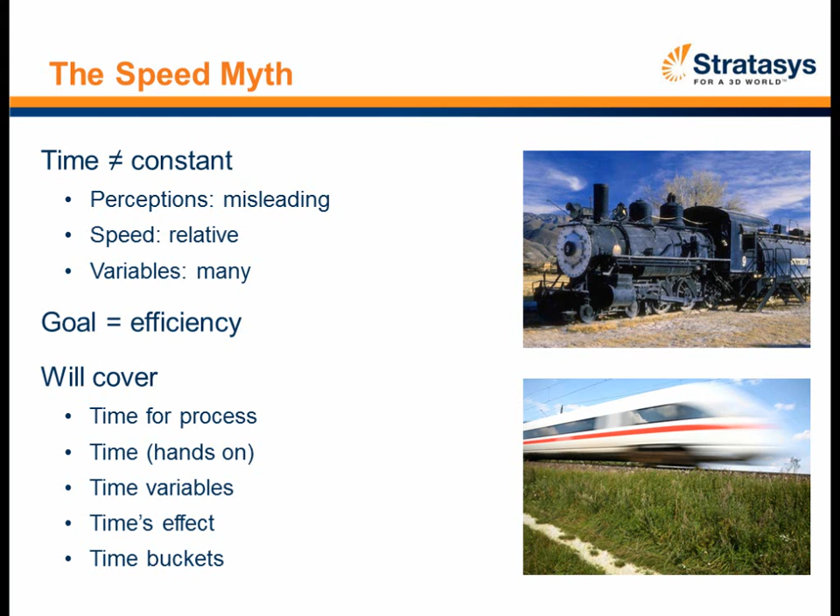And to start off with time for the process, the fable of the tortoise and hare popped to my mind immediately as I started putting this webinar together. Of course, we all know this fable. The tortoise plods along, heads straight for the finish line, wins the race because the hare darts along in one leg, stops and dawdles around and just kills time, then races again, and then stops and dawdles around a little bit, and then races again, but doesn't cross the finish line first.

In 3D printing, those legs of the race that the hare's creating, the start and stops, are actually part of the total process. It's not just build time. What you need to evaluate is more than build time. You've got to evaluate the total process time for what I've indicated here is file, which is file preparation, prep, which is machine preparation, the build time, which is important, but it's just one element, waiting time, that's after the machine finishes, but before you get to the final process, which is post-processing. You've got to evaluate each one of those 5.

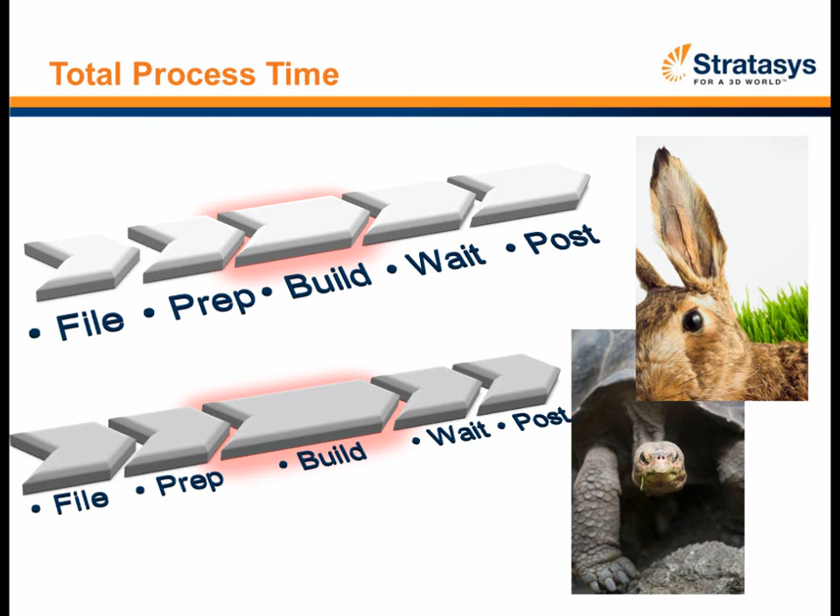Now, I'll give you some information on each of those 5 steps, information that will allow you to ask intelligent questions and to dig in to what will affect your total throughput and your delivery time for your prototype parts and additively manufactured parts. First step, and again, this isn't specific to any one technology, and these are just some of the highlights. I can't get into all the details because the technologies are so different and have so many different variables and factors. But overall, these will be true of most systems.

Right up front, you've got the time to prep your file. This is once you've received the STL file, how much time goes into processing it to make it buildable. And that'll include orienting the part. That'll include the time to add support structures to the part, the time to slice the part, and the time to apply the build parameters, which may be default build parameters, which is a simple one-click operation for some systems, or you may actually be using some custom parameters, which may take more time.

So it's important to investigate each one of these aspects in file preparation to come up with your total tally for your parts on how long they'll take. And one thing I don't have listed here is there may be the need to do some file repair. STL files are notorious for having small gaps and overlaps and inverted normals that make them unbuildable files. Well, some technologies are more sensitive to small deviations and errors than others.

So you may even find in file prep that one system you need to do STL repair, another system you don't. The STL repair may require a third-party program, an additional step, which all adds time.

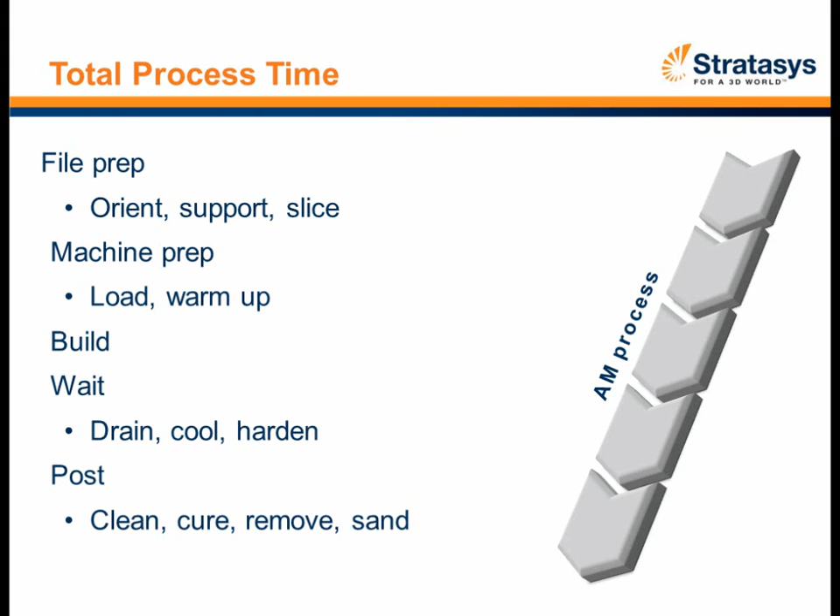You remove the material, and then you also remove support structures. And then finally get to the point of sanding the part and finishing and painting to your needs. It's important to understand all those steps and the time that will go into the process for your typical parts. Now, that's the total process and what goes into it.

Another aspect of time and speed of delivery is manual versus automated. Now, this is one that may or may not be important to each of you as individuals, but something to consider. I personally think that a 2-hour process that's entirely manual versus a 2-hour process that's entirely automated are two different things. I'd view the fully automated process as being more efficient in delivering the parts because we're looking at resource demands.

A friend of mine in the toy industry I spoke to several years ago actually gave up on using a technology that produced very nice parts for small figurines that they were doing. They loved the technology, loved everything about it, but they stopped using it because they could produce dozens in a couple of hours, but it would take them 2 or 3 days to get the manual labor, the man time, the resources, the human resources into the post-processing operation to even start touching the parts. So a couple of hour turnaround time turned into 2 or 3 days for them.

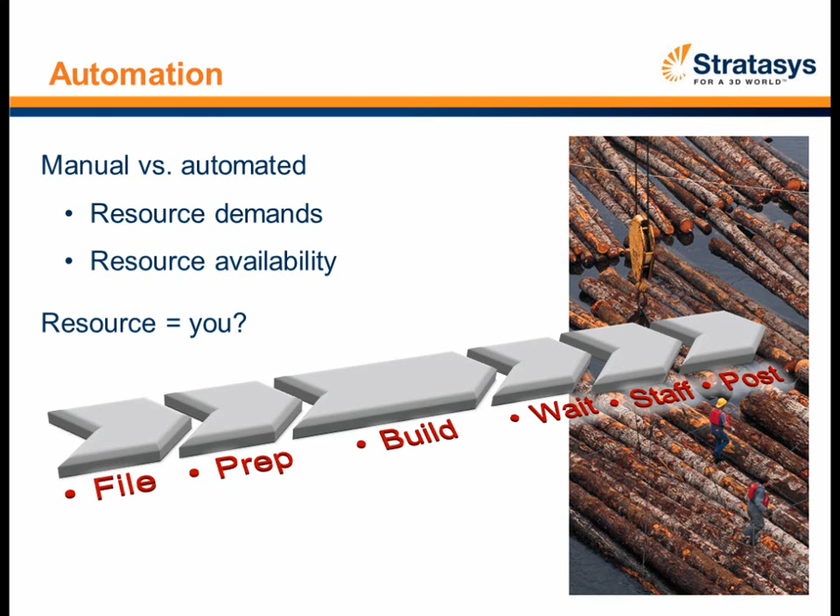Now I really think automation comes into big play because while you're busy doing a post-processing operation or manually doing something in the 3D printing operation, you're not doing the job that you're paid to do. So there's forest fires raging, there's projects to be tackled, tasks to be done, and your decision is, do I tackle those or do I go and do the manual operation?

The next area I want to talk about is build time, or actually the variables that go into defining the total build time. Build time is not a constant because it depends on the parts that you're building. We have 2 different modes of operation for building for most of the technology. You can have presets, which are default build styles. Simply select from a drop-down list and say apply style A, and that's how the part will be built. Or you can apply your own custom configurations, custom styles to get different qualities for your part.

Well, even with the presets, the fixed build styles, you'll find that there's a lot of variance in build time based on things as simple as orientation of the part, the volume of the part, the surface area, and the footprint. Matter of fact, if you took two identical parts in 3 of these 4 categories and left only the 4th category as a variable, you change that one up, you will have 2 different build times in most of the technologies. Now, let me explain these real quick.

Orientation is the orientation of the part. I think as many people recognize, the taller a part is in 3D printing, the longer its build is going to be. So orientation has a big effect on build time. The volume of the part, that's the total cubic inches of material that go into your part, may also have an effect on time for some technologies.

Surface area, now this is one that people really don't think about. There can be different build approaches or styles. The system may perform differently on external and internal skins than it does on all the area that fills in between. And usually what's being done is things are changed to improve surface finish or feature detail. Well, to change surface finish and feature detail often means that the process is slowed down. So if you have more surface area, more exposed area on the part, you might have a slower build time or a longer build time.

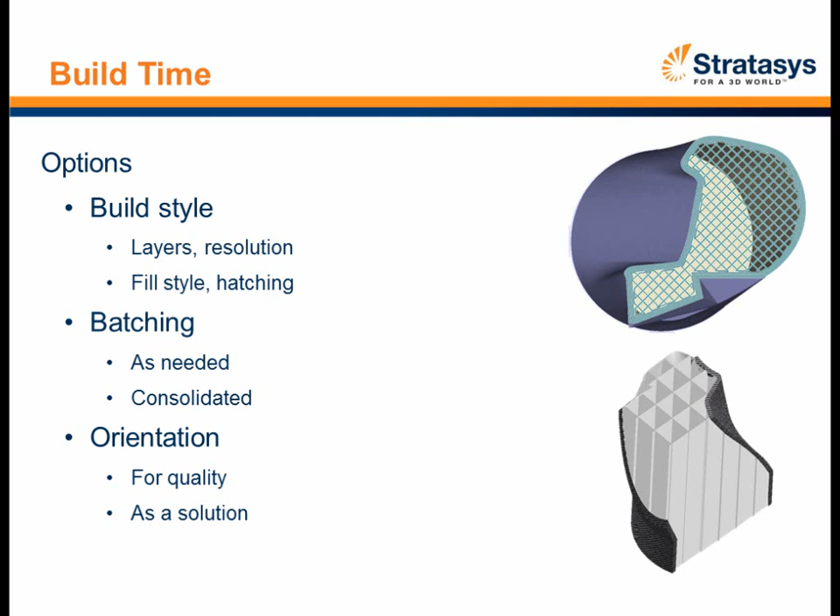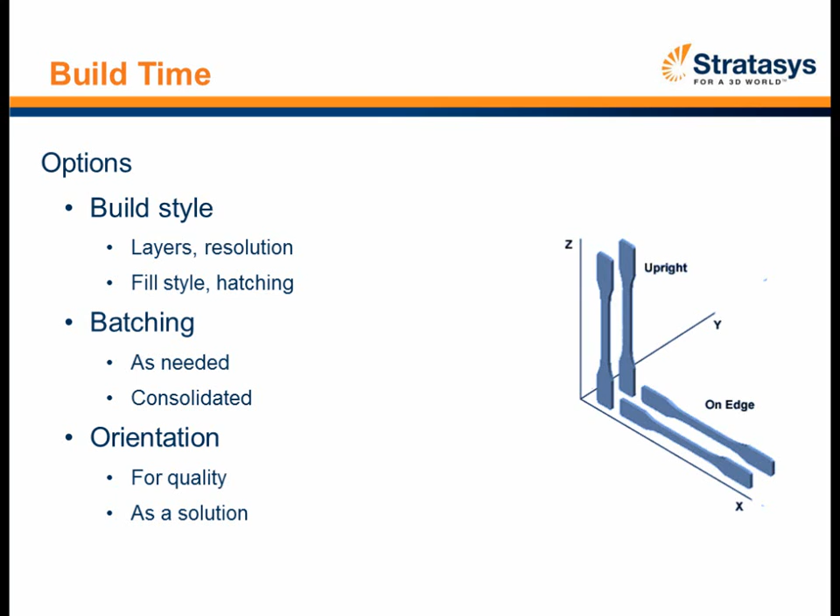So that's not all the variables in build time, but those are some of the things that you want to consider in your evaluation to discover what's truly the fastest. Now I'm going to move on to the fourth area, which is time's effect on time. And it's not a very good title for the slide. I know what I'm trying to say. It doesn't come across here, so let me explain.

Over time, some 3D printing technologies will get slower. So if you were to build Part A on day one and it takes 4 hours, a year from now, you may find that Part A builds in 5 hours, 6 hours, 7 hours, some additional time. And the possibility for it is twofold. One is if the system has an energy source converting the material into a solid form, and that energy source slowly degrades over time, well, it's going to take more time to process the part. Also investigate if there's any changes in the material's reaction to the processing.

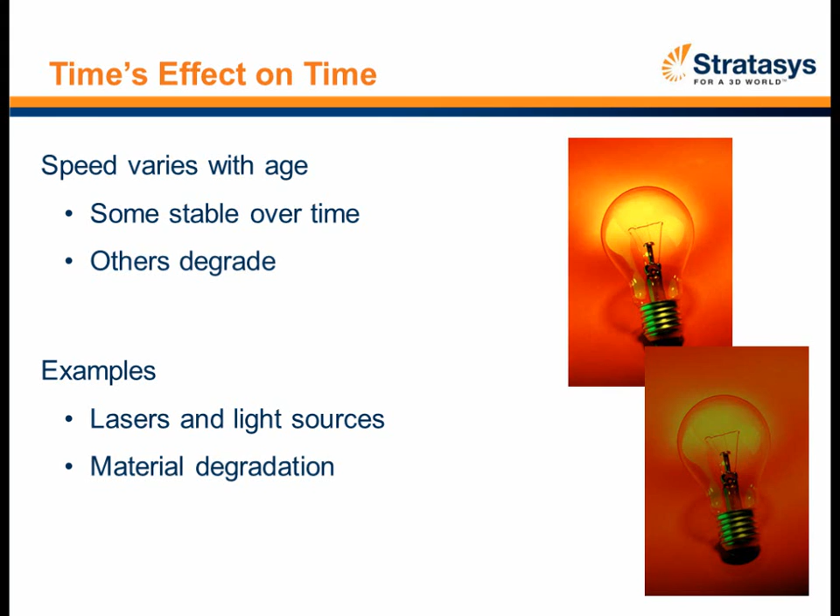If you have a technology where you replenish material after every build by adding fresh material to something that's already been in the machine, the older material, the material that's already been processed, may have gone through some changes that affect its ability to cure, to solidify, to be processed as quickly as when it was fresh. So that's something to consider when you're looking at total speed and delivery time of your prototypes when you're evaluating the technology.

Now I'm going to move on to the last of the 5 areas that I want to bring up with respect to the speed myth, and this is time buckets. Now this is fully in your control. This is about how you will operate your 3D printers in an everyday, normal fashion. Now, I'll admit, it's always comforting to know that your 3D printer could respond at a moment's notice to an emergency. So there's a design review meeting called, surprise, surprise, at 8 o'clock tomorrow morning, you need to rush out parts, or a big problem happens and you need to come out with a new redesign real quickly. Well, it's nice to know you can respond to that quickly.

But I find from day to day, and this is talking with lots of customers, lots of users of 3D printers, that we tend to fall into standard operating modes. I've already talked about parts individual or consolidated, and this is kind of back to that, but you'll fall into the operating mode of building parts as you need them or consolidating multiple parts in a build. And if it's the latter, then you'll probably find yourself working in time buckets. Mentally, your schedule will operate on maybe a 4-hour cycle or an 8-hour cycle or a 24-hour cycle.

And what I mean by that is you start to go into your days, your weeks, and your months with respect to your 3D printer, considering that you'll kick off a build at 8 in the morning and then one around noon if you have 4-hour cycles, then one around 4 o'clock. If you're an 8-hour cycle kind of company, it would be one at 8 and one at 4. And if you're 24 hours, it would be one at 8 in the morning and the next one at 8 in the morning.

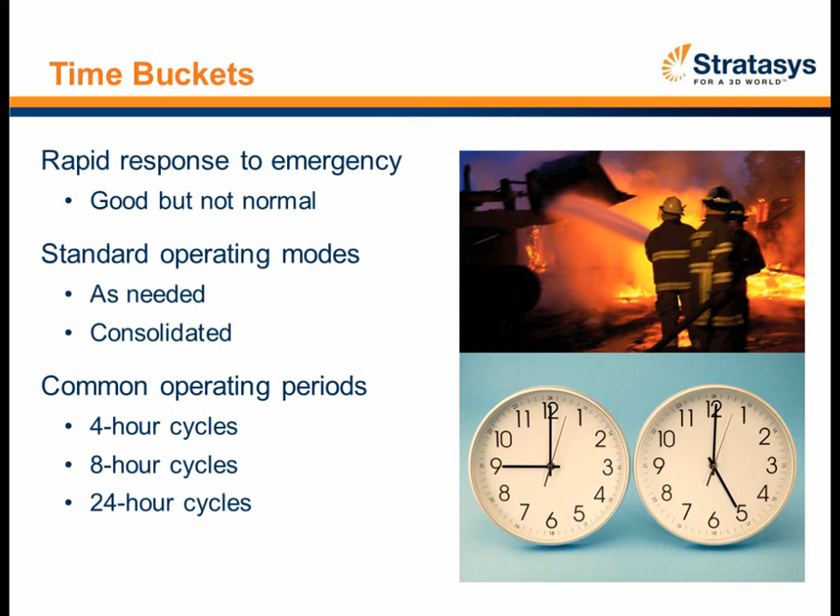And I bring this up because this will actually throttle a fast technology, or bring a slower technology up to and possibly equaling something that's faster up to the point of post-processing. So what you're going to want to do is get an idea, if you can, of your operating environment, your typical parts, and then look at systems that can deliver in a 4-hour, 8-hour, or 24-hour cycle. But the most important point, a little image here indicating your 9 to 5 workday, which if you're like me, is far from 9 to 5 anymore.

But an example here, arbitrary example back to my grayish blue and yellowish gold lines. We've got 2 processes, and this is the total time up to removal of the part from the machine. If we compare them without any other information, we say that the yellow line is faster than the blue line. But let me throw a little calendar for the day behind that. What if you kicked off both builds at 8 o'clock in the morning? And what if you only operate on a single shift, meaning that after 5 o'clock, there's absolutely no one in the facility to take a part out, kick off another job, and start post-processing it?

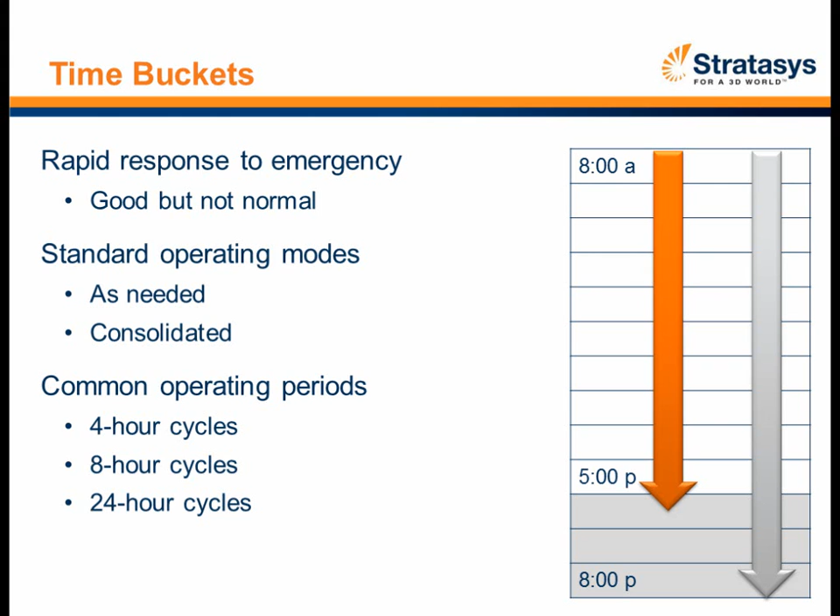If that were true, with these 2 builds, even though one is 3 hours longer than the other, effectively the speed is exactly the same. Both of the technologies would have parts ready for post-processing when you walk in the door the next day at 8 o'clock in the morning. Matter of fact, that blue bar could go all the way out to a 23 3/4 hour build and still be the same amount of net time or throughput for the machine as the much faster build that runs from 8 to 5:30. Important considerations in looking at speed.

And I'm going to wrap up now. We've covered the 5 areas: total process time being more critical than build time, automation versus manual operations and how important it is in your decision making. Then we looked at the variables for build time. We looked at the effect of time on your machine and your materials affecting the throughput.

And finally, your time buckets. And with that, I really hope that you can see that there's way too many variables in 3D printing to make any generalizations about what's a fast machine, what's a slow machine, and what falls in between. And remember that everything is relative. Speed is relative. Key point here is that no matter what technologies you're looking at, always keep in mind that there's a relative component of speed to all the conventional and traditional methods.

We're always going to be faster with a 3D printer if there's no tooling that exists or tool paths or setups or jigs or fixtures sitting there ready and waiting to machine or mold a part. We are going to be faster, so it becomes degrees, relative degrees of speed as you jump into 3D printing.

And the key thing here is to know what's important to you in your evaluation of 3D printers, what your parts look like, what your process looks like, what your applications are going to be, what the needs and requirements of those applications are, so you can communicate those to those companies that want to provide you a system, and then you can inquire, what will the total speed be for my parts in these considerations?